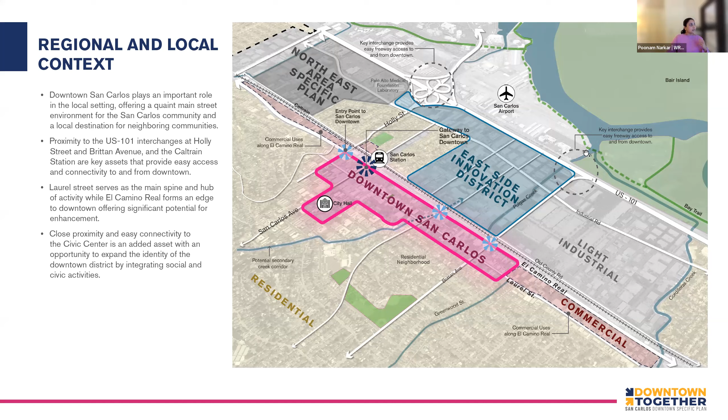We started to really ask ourselves how do we access downtown—how is the city, how is the community getting there? This diagram shows the key corridors: El Camino Real, a major state highway; arterial roads such as Holly, San Carlos, and Brittan Avenue that get everybody off 101 and into downtown; and Arroyo Avenue, a significant connector between downtown and the East Side Innovation District. We realized there are key points along El Camino Real that serve as gateways into downtown. So what does that mean, how do we want to treat them, and what kind of attention do these intersections require?

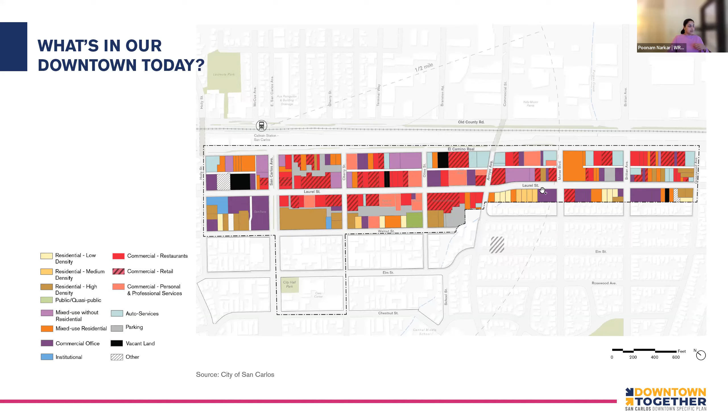There's a lot of activity downtown, but we wanted to understand at a finer grain what's happening at the ground level. There's a diverse mix—restaurants, small commercial retail, commercial offices—all with a certain level of activation along Laurel Street as well as San Carlos Avenue. How is downtown doing?

We heard that residents are very excited about the 700 block closure of Laurel Street, and we're excited about the new opportunities that closure provides. The community's aspiration is to see what this block can transform into. But along with that, what happens on either side of the 700 block—how will the 600 and 800 blocks also transform to create a cohesive environment?

While there are some really good things working in favor of downtown, there are also areas that need improvement to stay competitive with neighboring communities—making sure all businesses are equitably served by the types of improvements along Laurel Street. We want to make sure no particular type of business dominates the experience. There are areas from an economic perspective this team will look at in order to create diversity of experiences and uses to serve the needs of the community.

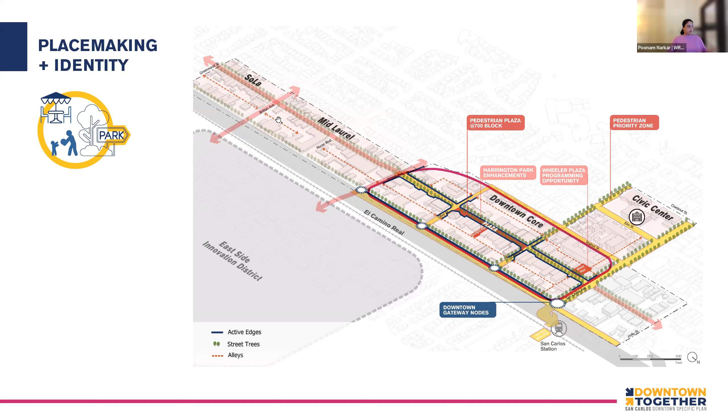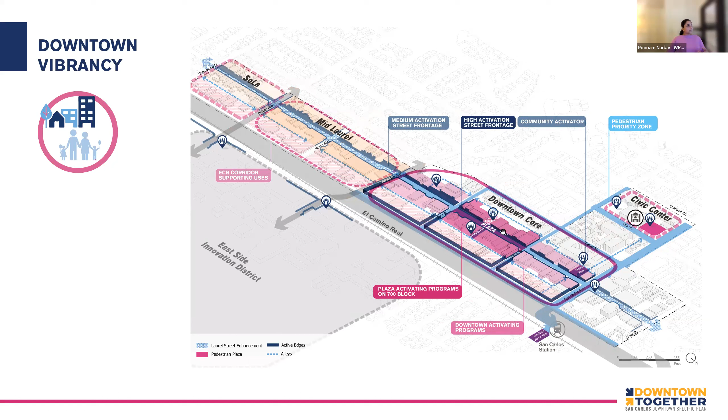Downtown vibrancy looks at the diversity of uses and how future uses would be located within the downtown core and the Mid Laurel district along El Camino Real, to support the vision for creating a pedestrian-oriented, diverse district. Mobility and connectivity is also very important to supporting the vision.

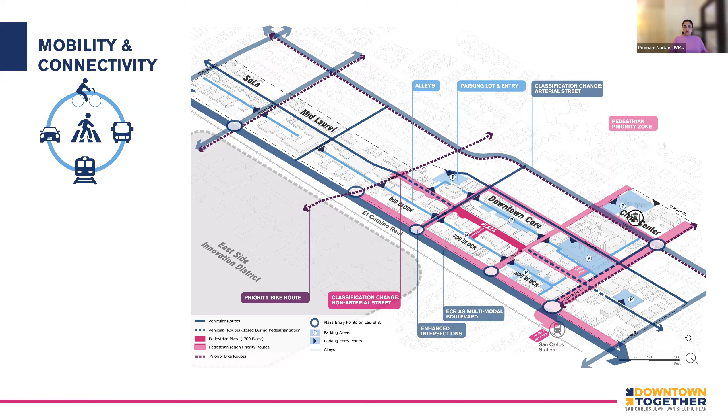How do we get to downtown? How do we move around downtown? What modes of transport and mobility choices do we have to enjoy downtown are equally important. All of these three frameworks, along with equity and resilience, really informed the design concepts we are going to share tonight. I'll hand it over to Jim Stickley.

Thanks, Poonam. So in the three diagrams Poonam presented, looking at mobility and downtown vibrancy, the 700 block is really so central to the success of downtown, and its closure is something strongly supported by the community.

I think this plan wants to take that closure seriously, building upon the idea of the street closure—not only having a street with a barrier at each end, but really creating a public space that can accommodate all kinds of downtown activities, in the same way a public plaza might do.

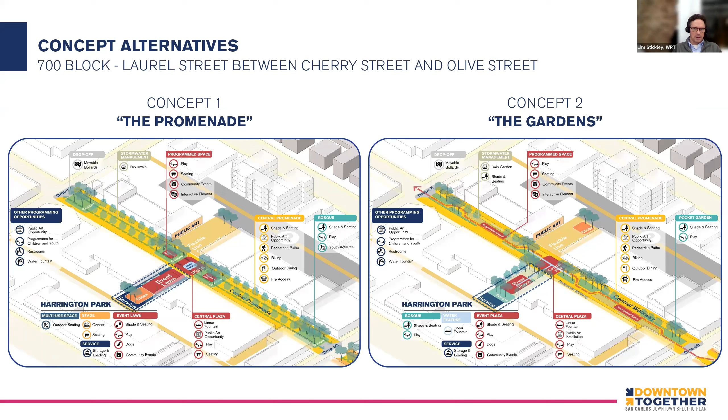So really sort of changing this from a street to a very nicely designed public space. We've just jumped right into the 700 block, and we've developed two sort of very conceptual approaches to that space. I'm going to just present those very quickly, each individually.

The first one is called the Promenade, and it's very linear, very urban. It really focuses on a building face to building face space, so getting rid of the street curbs and making this a continuous plaza surface. This would really stress outdoor dining, a much wider space for outdoor dining on the edges, and a central promenade for strolling and for the programming of different uses.

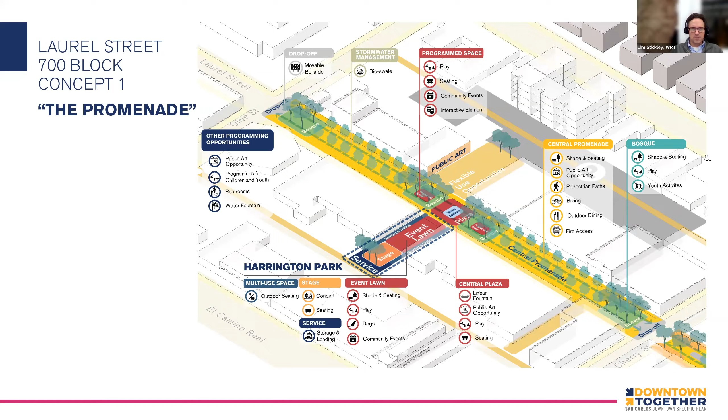You can see on this diagram all of the different kinds of uses that we've been hearing a lot from the community, things that they want to happen: places for seating, places for shade, places for outdoor dining, building upon what's going on there now, but also spaces that can be used for special events, for performances, concerts, etc. Going to the next slide, we can see just some illustrations of how some of those functions could exist at each end of this block.

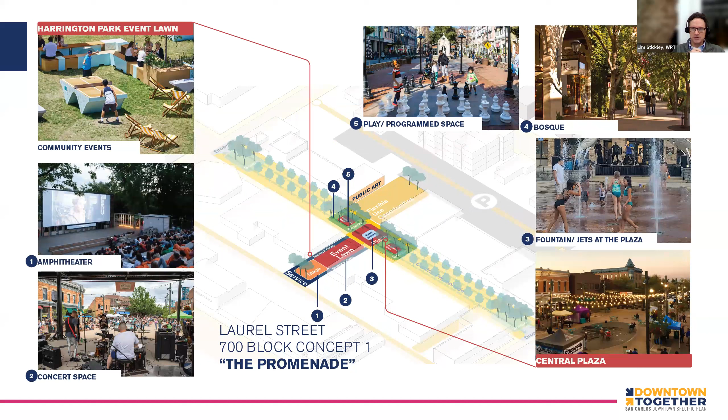In the next slide, this focuses on the central portion of the block, and it's capitalizing on the current use of Harrington Park, creating a stage there and an event lawn, but really formalizing that into something that can have a lot of heavy use.

Right now it's a bit trampled. It gets a lot of use during certain festivals. So how do we make that into a permanent venue that really is successful in accommodating different types of events? You can see some images of examples in other places where that's happened.

This also has sort of a water play element in the center plaza. You can see an image there, number 3, that it's very interactive. That's one approach to introducing water into a space like this. It can be programmed in other ways too, having games like ping pong and chess and things like that.

Places for public art, and then a continued flexible use of the Bank of America parking lot. They're very good about accommodating activities during special events, and a continued use of that space could really be a nice supplement to this central core of activities.

In the next slide, this is now a second scheme that we looked at. It's called the Gardens. This one is a little bit more green, a heavier green element, if you will—groves of trees that sort of alternate back and forth from one side to the other, and then a promenade path that winds between those.

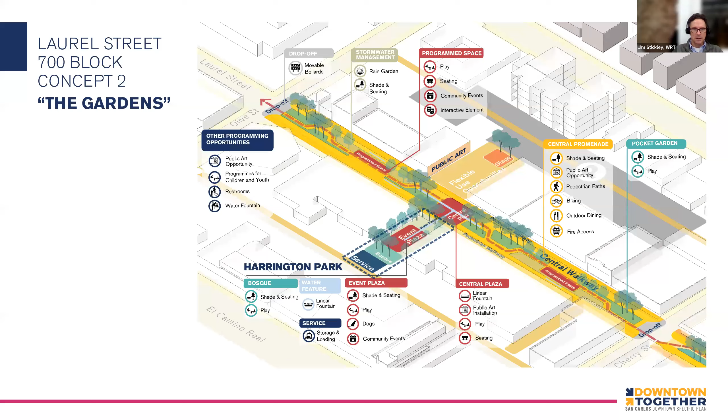That could be planted underneath, or it could be hard paved, so it could accommodate outdoor dining or other program elements, while still accommodating a very heavy dose of outdoor dining on the edges in front of the various restaurants, and other spaces to accommodate a variety of other program elements—places for teens to hang out, places for kids to play, etc.

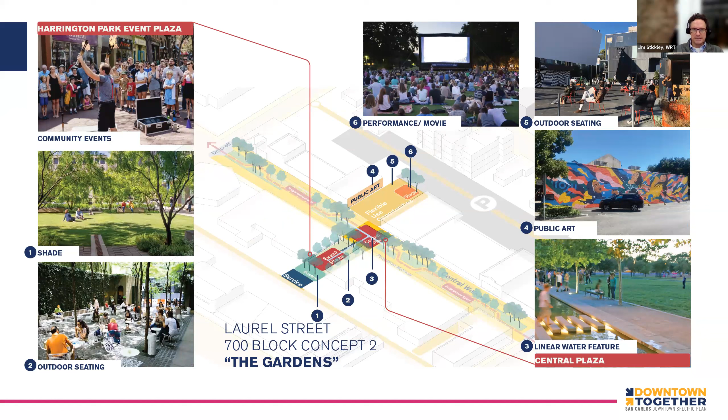In the next slide, a little bit different approach to the center plaza area. This one might have an events plaza instead of a lawn. It might have more of a linear fountain that's more structured, more sculptural, but similar to the other scheme, places for public art and for flexible events, outdoor performances, etc.

As we move on, we've developed this scheme also for the 600 block. This really is being seen as something that could be quite integrated with the 700 block, even as it allows for automobile circulation and parking.

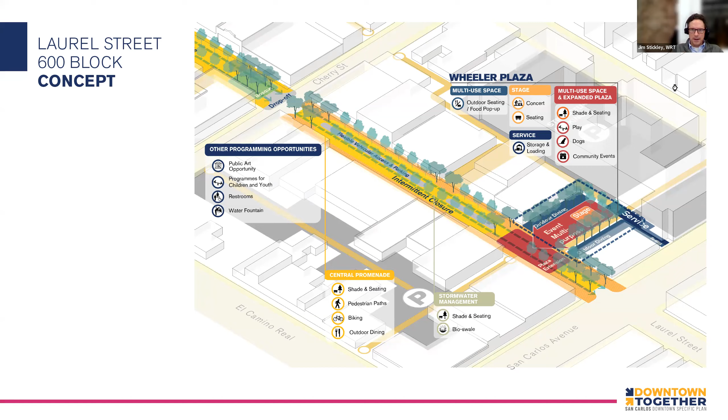But how do you take those functions and put them in a context that looks more like a public space, more like a plaza, and is more unified with the improvements made to the 700 block? So it's all working together. The Wheeler Plaza offers another opportunity to have a plaza space that might extend right across the street, and be used for different functions.

So in the next slide, you can see illustrations of what some of those functions might look like, really viewing this as the gateway to downtown when you come off of San Carlos from the train station. Looking first at the length of the street and how it might be reorganized to allow more space for sidewalks and stormwater management gardens, with the vehicular space a bit more constrained but still allowing two-way traffic, on-street parking, and other curb uses. The main change would be much wider sidewalks, so more room for outdoor dining and circulation.

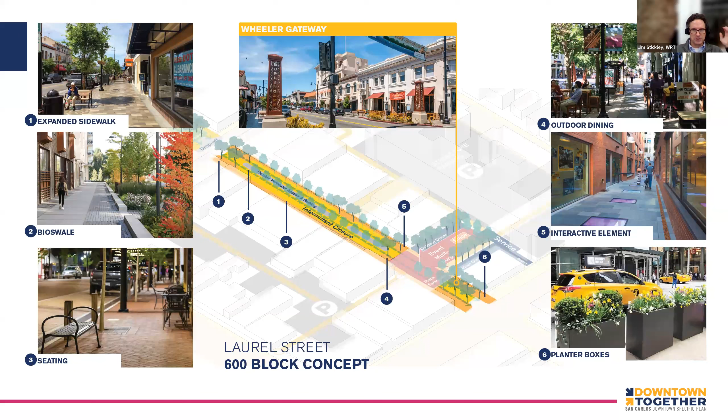As I said before, that feeling of plaza could just extend right across the street. So when you come from San Carlos and turn onto Laurel Street, it's almost like you're entering into a plaza rather than turning onto a street. However, cars could still freely flow back and forth. You would still have access to that, except during special events.

All of these proposals have a specific outcome in terms of the street design itself. In this 600 block scheme, which is an approach that could also be taken with the 800 block, we looked at two different alternatives. One would widen the sidewalks quite a bit, and then allow on-street parking on both sides, with narrower traffic lanes. The big change here is we would change from diagonal parking to parallel parking, a small reduction in the number of parking spaces, but it creates more room for the sidewalk, still room for stormwater gardens, and room for a robust street tree strip with a continuous soil trench, important for greening.

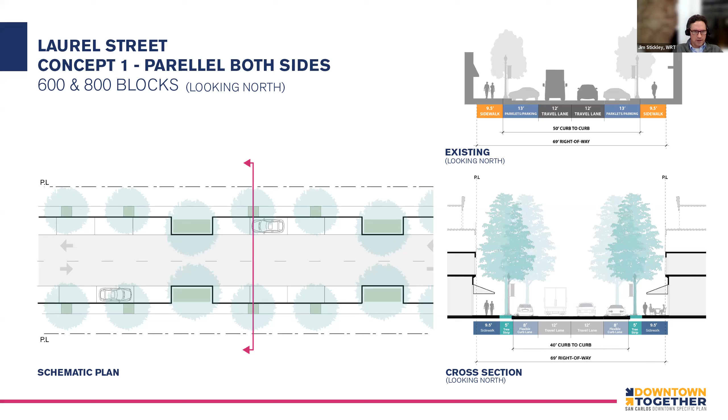In the next slide, a little bit more extensive change. We'd ideally like to widen the sidewalks more, getting almost 15 feet of sidewalk, 14.5 feet if you see the cross section. The parking would be only on one side of the street, switching back and forth as you go down the street, with the travel lanes weaving to access those. This would be a reduction in parking, but it would allow considerably more space in the sidewalk for outdoor dining, and still plenty of space for circulation.

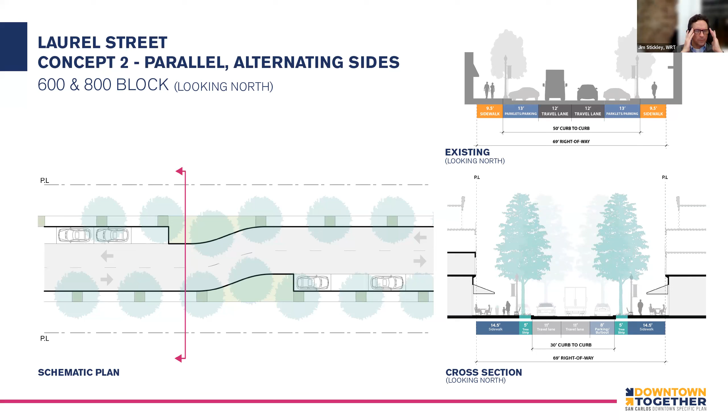As I said before, the materials used in the street and sidewalk could be unified with the materials in the 700 block, so this would all really read as one continuous downtown space. And then as we move forward in the next slide...

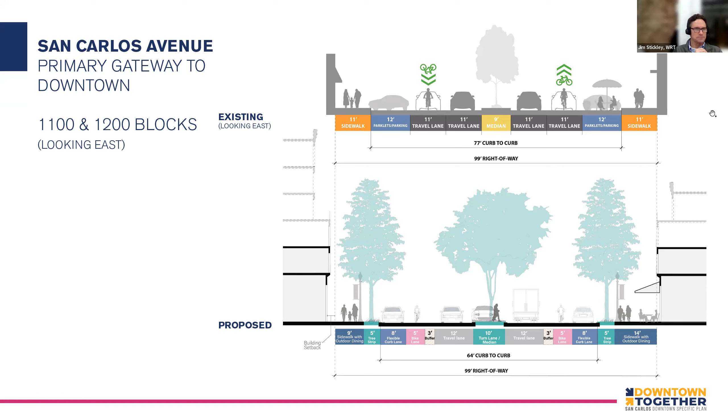And the next slide, similarly, El Camino Real has a very important function as a vehicular corridor, but it also wants to take on a more pedestrian function as the downtown evolves and develops.

So this picks up on some ideas that were adopted in the city's Bike and Ped master plan, and sort of fine-tunes them a little bit more in terms of getting a very strong green element, a center median planting strip that then can double as a left-hand turn lane, two lanes of travel in each direction with left-hand turn pockets going in both directions, a protected bike lane, nice and wide, 6 feet of travel, 5 feet of buffer, except where you have a bus stop, in which case the bus stop would have a 6 foot boarding island, and then the bike lane would slip behind that. Wider sidewalks on both sides, etc.

So some changes to El Camino Real that I think are quite important to accommodate your changing downtown.

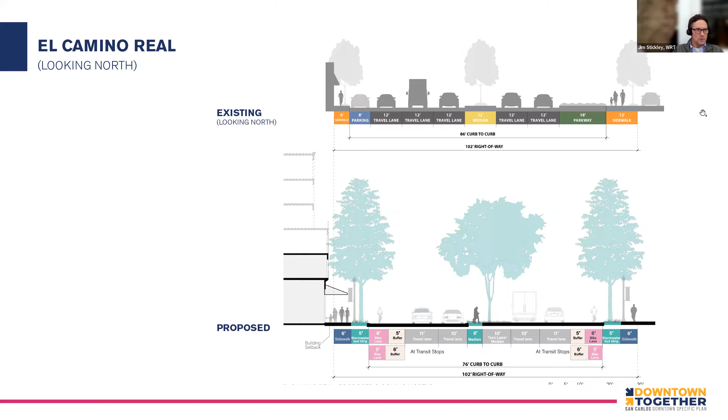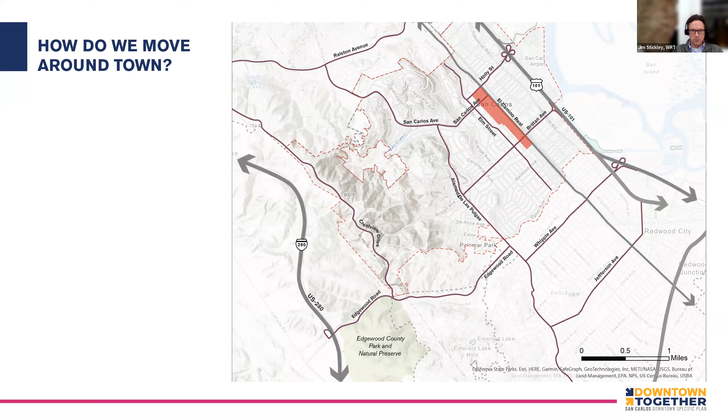How can we still come into town from the freeways, from 101, from 280, efficiently get to the places we need to go? What are those main arterials that bring us in and out of town from a larger scale? The importance of Holly, of Brittan, of Edgewood, etc.

And then zooming in, how do those translate to the closer-in picture that Poonam had presented earlier? What are the key arterials for coming in and out of town? Holly and Brittan, El Camino Real, of course.

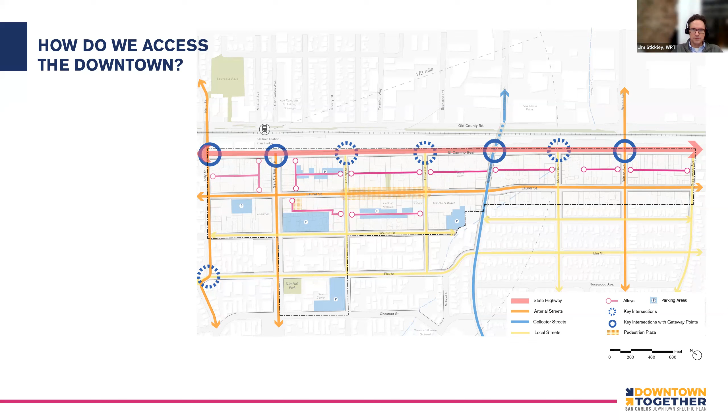So we've looked at a number of ideas of how to make those flows happen efficiently and smoothly. Another backdrop for this is looking at how the downtown is used for special events.

So in one type of event, scenario one, the 700 block is used as is, just as a pedestrian plaza. That's something, incidentally, that has happened, and the circulation patterns have adjusted in many ways. People are finding ways to circulate around that block, not having the use of that 700 block for vehicular access. In scenario two, in certain types of events, the 600 and 800 blocks are temporarily closed to vehicular traffic, and San Carlos is maintained with vehicular flows.

And then in scenario three, in larger events like the Art and Wine Festival, not only the 600, 700, and 800 blocks are closed, but also the 1100 and 1200 blocks of San Carlos. This is a really nice thing that's happened in San Carlos, this sort of flexibility of how you're using these different downtown streets.

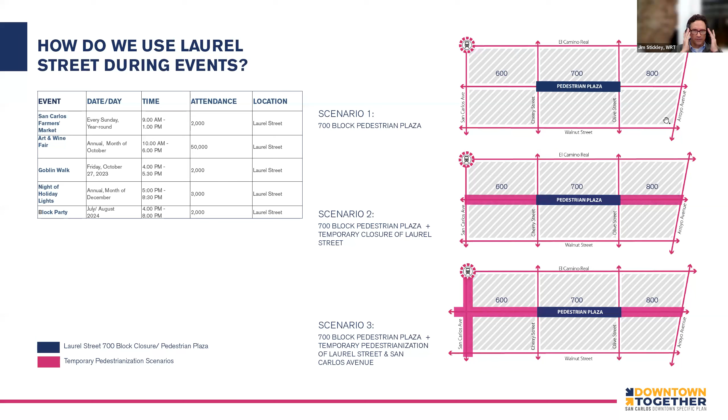In different ways for different events, closing those streets, reopening them during normal times, for business as usual. So it's a really nice level of flexibility. And with that in mind, what might be some of the circulation scenarios that get people around the downtown efficiently? I'll just briefly go through these one by one.

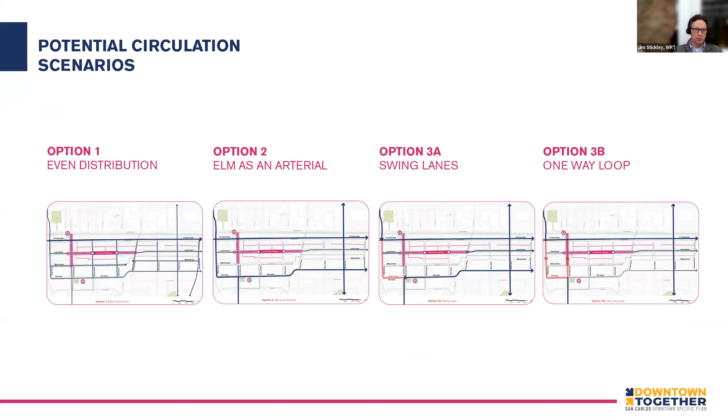So option one is called even distribution. This is sort of what's happened already, where the 700 block has been closed, and the hierarchy of all of these streets sort of remains the same, except for El Camino Real, Holly coming in and out of downtown, and Brittan. Otherwise, people have sort of found their favored routes, and traffic flows have redistributed themselves.

So scenario one says that you would continue with that as the downtown continues to grow and change. You would encourage this even distribution of flows, still getting people around downtown and still getting them to the parking areas around downtown when their destination is the downtown itself.

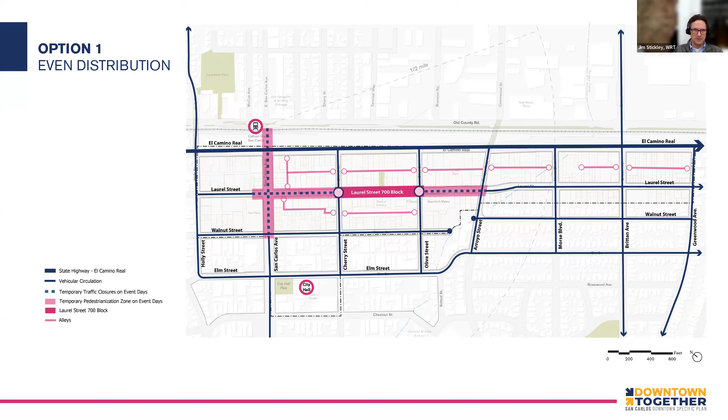And option two says, well, no, we're going to take a little bit different approach. We want to be more deliberate about getting people from Holly onto San Carlos Avenue. Elm Street has a greater role as a way to get from Holly to Brittan and vice versa. Some people are going to be coming in on Brittan and may want to circulate to San Carlos Avenue on Elm Street.

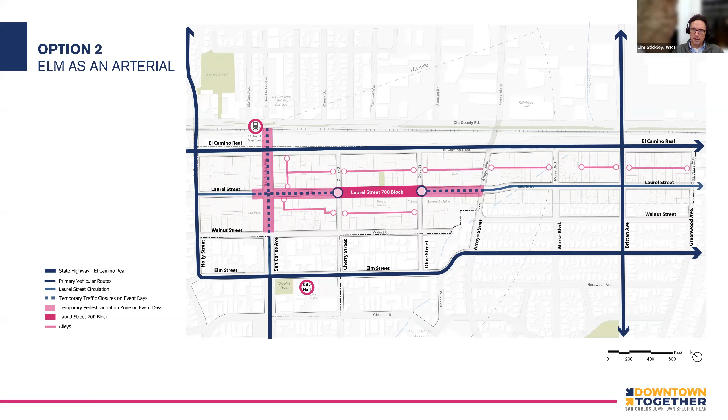So how do you start to create a little bit of hierarchy where El Camino Real still has a large function, and Elm Street has a little bit more function as a crosstown arterial. Laurel Street used to be that arterial, but with the 700 block taken out, is there another street designated for that function to help people get around the downtown?

This third option says that you use Holly and that first segment of Elm Street, between Holly and San Carlos, with a swing lane scenario, which operates much like Holly Street does farther east, where the parking lane becomes a commuter lane during rush hour traffic. That switches in the morning and evening commute hours to allow an additional lane of flow to come all the way in on Holly Street, and then on that first block of Elm, transferring to San Carlos Avenue as those flows do today.

Elm still has a fairly important role here to get folks from the north end of downtown down to Brittan. So this is just another scenario to think about.

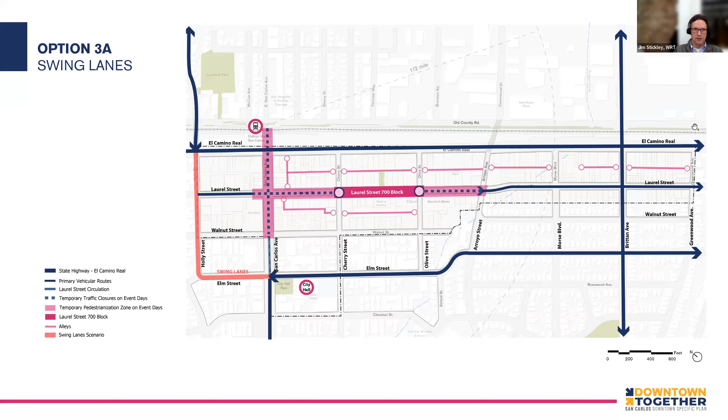And then in the last scenario, actually looking at a one-way loop. Holly Street becomes one way from El Camino Real all the way to Elm Street. That first block of Elm becomes one way, and San Carlos becomes one way from Elm Street all the way to El Camino Real. El Camino Real, of course, remains two-way and completes the fourth leg of that loop. This would be a way to really accommodate commute traffic in and out of downtown morning and evening in a very efficient way.

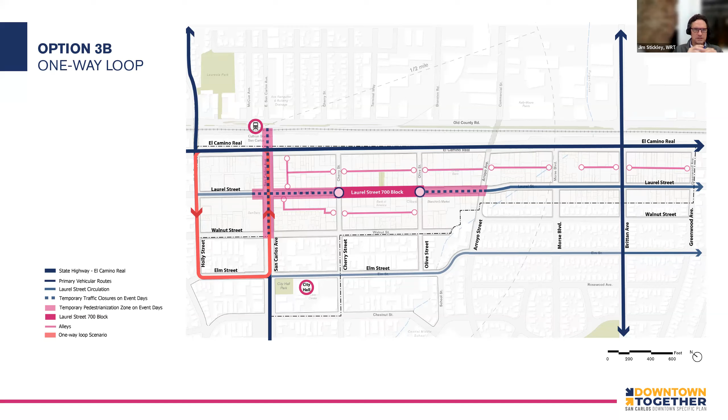So those are just explorations. It's fairly early in our process. I think we're looking for some feedback on the pros and cons of those different scenarios. That's one thing we'd like to get into a little bit in the breakout session.

Everyone's being brought back into the room. I can say most definitely that my group had a lot of things to share, and we didn't make it through all of the 6 boards. I don't know, how many other groups were able to get through all of the 6 boards? It looks like I'm getting a lot of heads shaking no. So we apologize for that, understanding that there was a lot of material shared this evening.